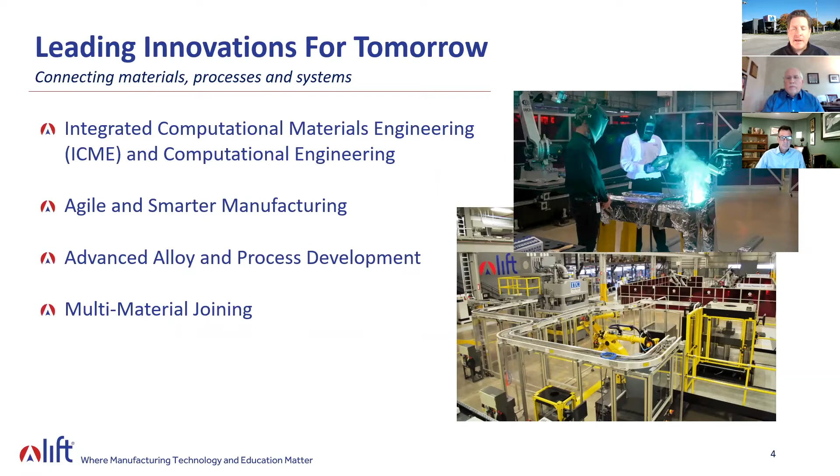So when we look at our Leading Innovations for Tomorrow, this is a quick look at our 4 pillars of technology. As you can see, it's materials, processes, and systems woven in between all of those. From digital side, examining materials from the integrated computational materials engineering side, to agile and smarter manufacturing, to advanced alloy and process development and multi-material joining. And you can see on this screen here how deep we get into each and every one of those. I won't give you a quiz on that, but you can just see how widespread and deep our technology goes, both in-house and across our national ecosystem.

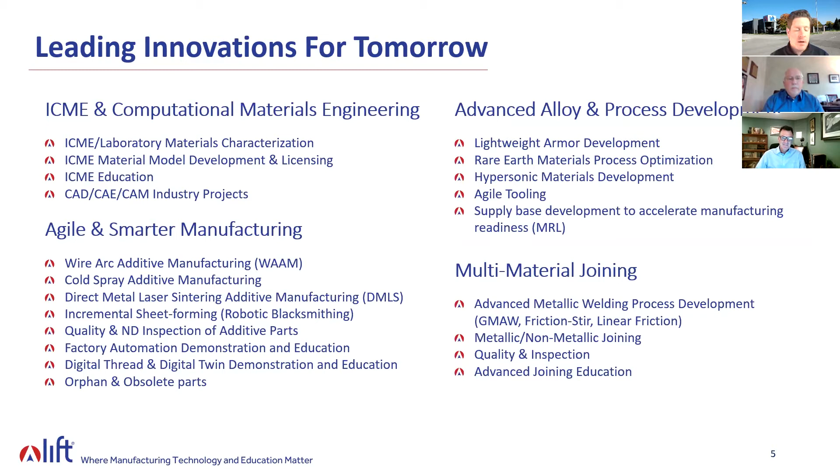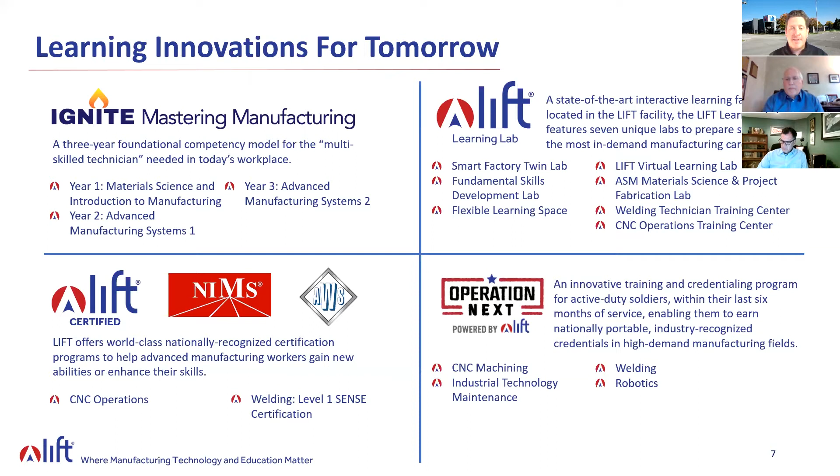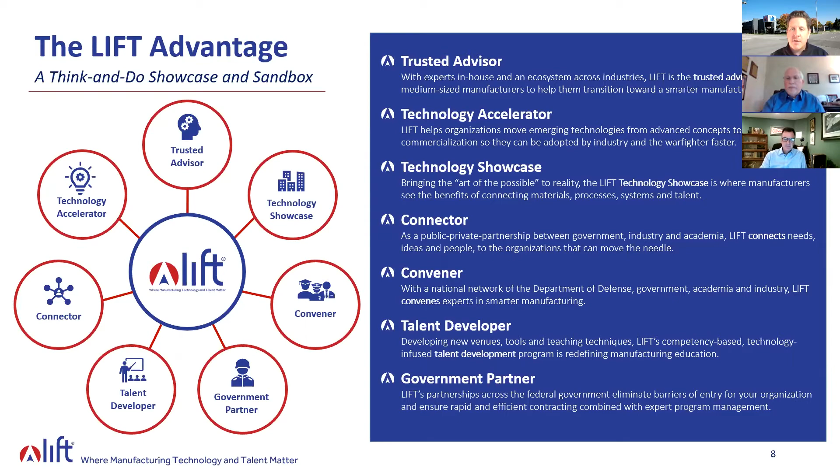I do want to hand the presentation over to Kevin and Charlie at the Techreo team to talk to us about their innovations in forming metal pipes. So I'm going to stop sharing my screen and ask Kevin to share his and tell you the show is yours. All right. Thank you, Joe. Hi, everybody. I'm Kevin McNeil, president of Techreo. I'm going to cover the first part of the presentation. I'm going to turn over to Charlie Ritchie, who's also on the screen here. Charlie is our vice president of commercial development.

So let's see. It's not advancing.

There we go. Sorry about that.

So Techreo is a technology startup company. We're in the Cincinnati area. And as Joe mentioned, we are focused on the development of high performance metal type pipes and tubes. So we'll start with a quick history lesson.

So pipes were first used around 4000 BC. So they've been around a long time. Copper pipes were first introduced around 2500 BC. So again, a really, really long time ago. And the current versions of both welded and seamless pipe have been around in their current configuration for about 150 years. So a long time.

These two versions account for about 99% of the metal pipe market. And while many refinements have been made, the fundamental pipe structure has really not changed much over those years. So we intend to be disruptive, and we've developed a totally new approach for how to make metal pipes.

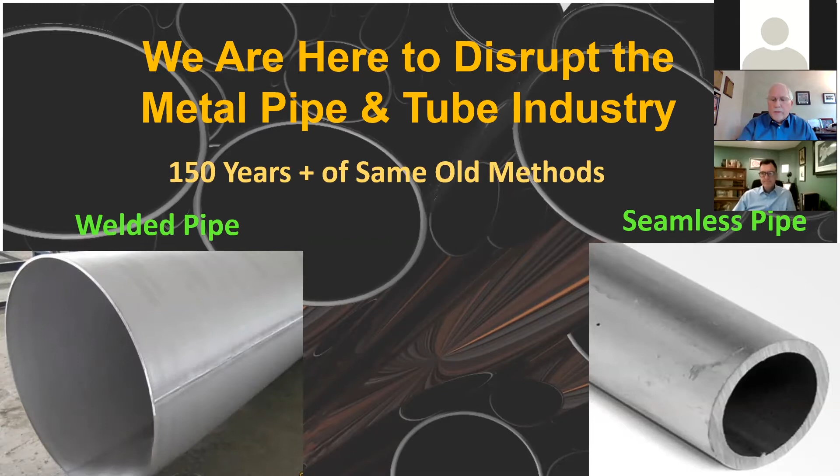So the new manufacturing technology is very, very different in several key elements. And basically what we're doing is we're reapplying some key technologies from the paper industry, which is where several of us worked previously. So we start with coils of thin cold rolled metal. We then unwind the coil, feed it into the winder, and along the way we bond adjacent layers of the sheet metal to each other with welding and or structural adhesives.

So there's some pretty general similarities to additive manufacturing in that we're building it one layer at a time. So this gives us the opportunity to differentiate by layer. That's pretty important. So we can change material at any point. We can change the thickness, the strength, topography, the bonding technique, pretty much anything we want by layer.

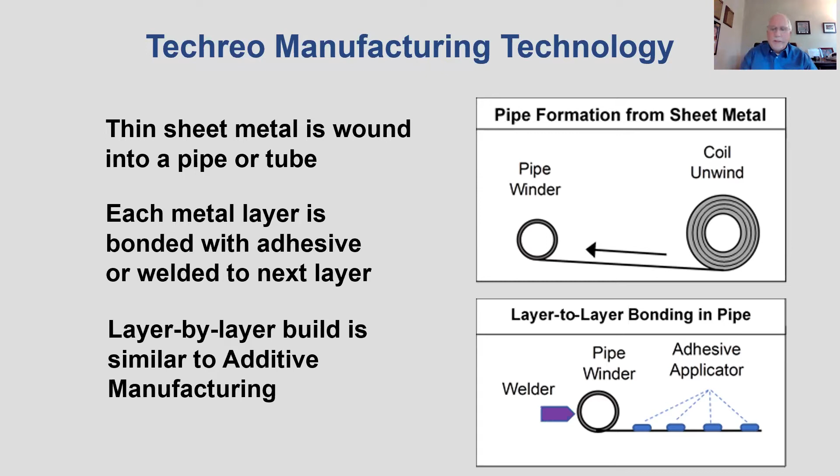A big difference from additive manufacturing, however, is build rate. So those of you who've worked with AM, you know it's pretty slow. Like maybe 1 to 2 pounds per hour of metal building. Our system is going to be much, much more productive than that. We think we'll probably be in the few thousand pounds per hour range. So that'll be a huge help for us in trying to minimize our manufacturing expenses. So again, a very versatile manufacturing technique that's also very new and different.

So the new process has tremendous flexibility. So we can use any metal that you can buy in cold rolled coil form, which is really just about everything. There's very, very few metals that don't come in that form. So far, we've tested carbon steel, several versions of stainless steel, copper, aluminum, and recently an Inconel type alloy. So lots of flexibility in terms of materials.

The bonding can be optimized for every application. So for example, we can use welding when we've got an application where we need high strength and a high pressure rating, or we can use structural adhesive, which is really good for building in insulation, noise, and vibration mitigation. So we can combine the two techniques and optimize the bonding for any particular application.

A key capability is that we can also splice in and out of different metal coils, so we can use multiple metals in the same pipe. So today it's really, you just get one metal. There's a few minor versions out there like cladding, but we have tremendous flexibility here and can use multiple metals. And I'll show you some examples of that and what the benefit of that is.

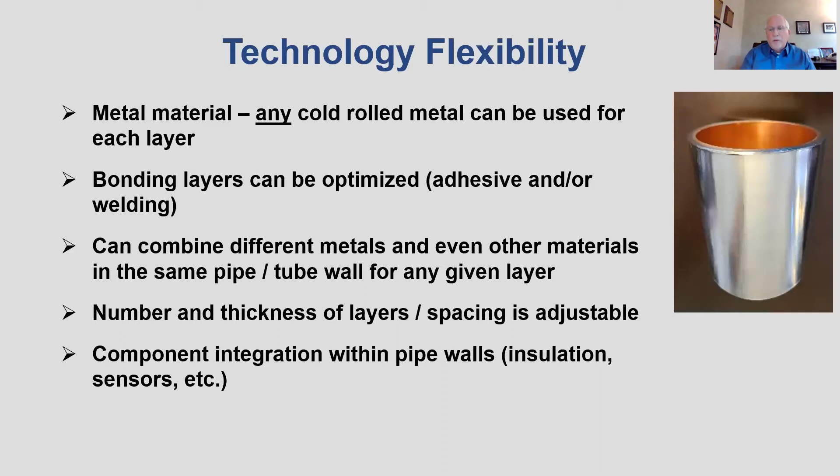So the industry's got a lot of needs relative to metal pipes. And while the current options provide a pretty wide range of capabilities between welded and seamless, there's still a lot of issues and constraints. So think about corrosion resistance. There's a lot of good solutions out there like solid stainless, copper, Inconel, and they all work, but they don't really work great in that the higher end ones cost so much more from a material perspective that people end up not using them.

So, how many times have you heard about a water main breaking? Well, if they'd used a stainless steel pipe, it never would have happened. But the county engineer chose to use a low cost cement-lined carbon steel pipe, and 10 years later, the cement cracks, the water gets to the carbon steel, it rusts through and you got a problem, right? So there's good solutions out there, but they're not great because the high performance ones are so expensive because you've got to buy the whole pipe full of that material, right? When you really only need it on the inside surface and/or the outside surface.

When it comes to weight, users generally accept whatever it is they get, right? Because there's not a lot of options. You can choose aluminum or titanium. If you're dealing with carbon steel and stainless steel, there's not a lot of options to get lighter and still work. So people sort of accept it for whatever it is.

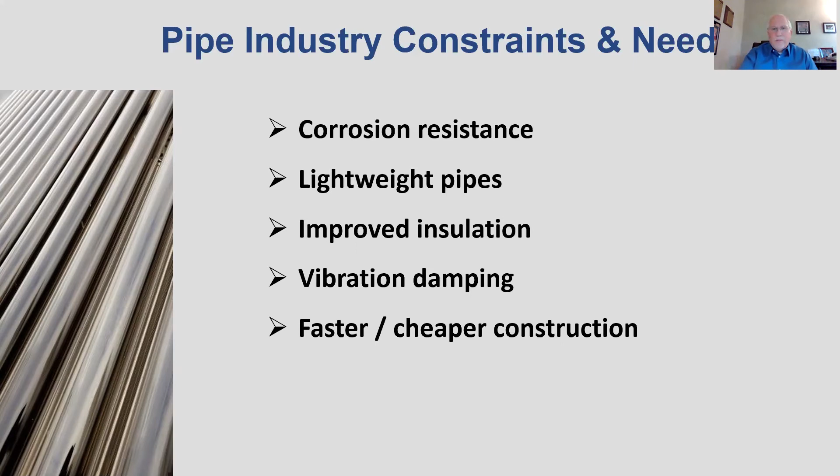So here's a few examples of our new pipe features available from the new manufacturing technology and how we can address some of those unmet needs in the metal pipe market. So I mentioned before, we can easily splice in and out with different coils and different metals. Here's 3 examples where we've done that. If you look on the left, that's like the previous picture. So we started winding with copper. So that would be on the inside surface of the pipe. Then we transitioned to carbon steel, which is pretty strong, but also very cheap.

And then we end up putting a stainless steel on the outside, so like a 304 or a 316. In the middle, we did the same thing, another example, where we went from stainless to carbon and back to stainless. And over here on the far right is an example, a little higher end performance application, where we started with Inconel and then went to carbon steel and then to stainless.

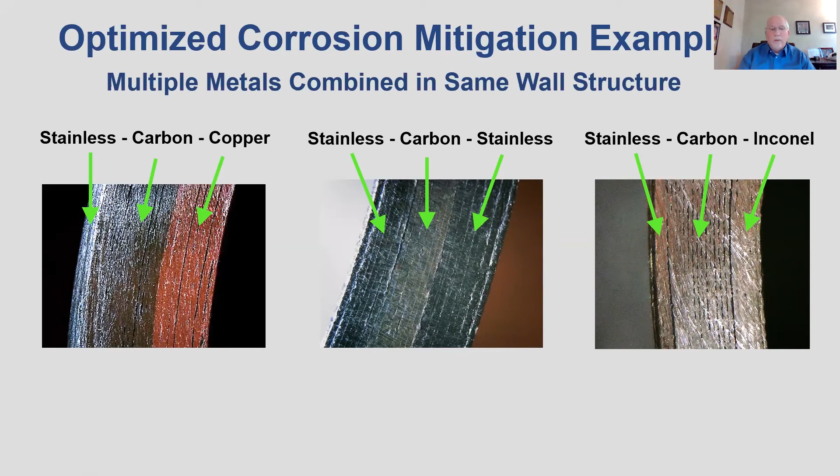Again, like the last example, if you wanted a pipe made out of solid Inconel, they are super, super expensive. I mean, you can get them, but you're going to pay a lot of money. So with our system, we can put Inconel just where you need it on the inside and then transition to other metals that are cheaper. So if you think about it, with the current system, you're paying for all that expensive metal and it's in the middle of a pipe wall where it's really not doing you any good. We can tailor it by region in the pipe. Okay.

Here's some examples where we can splice in and out and create lightweight options. So great for lift, which a lot of folks in this organization care about, lightweight and strength to weight. So here's some examples where, on the bottom left, we started with a stainless steel. We transitioned out of that, went to aluminum for most of the pipe wall, then transitioned back to stainless steel at the end.

On the bottom right is a picture where we started with a stainless steel winding, and this is actually a picture not of the finished pipe, but actually in the winding process. We paused and took some pictures. So you can see the stainless steel tube at the bottom that it's already been wound. And then you see the incoming sheet of carbon fiber.

So again, this is an example where we didn't even use metal. We transitioned to a completely different material, carbon fiber, super strong, but also very, very lightweight. It's a great example of the flexibility and versatility of the technology. If it comes in sheet form, we can probably put it into a tubular structure. In these two examples, both of these pipes ended up being about half the weight of a normal pipe, if you just made it out of solid stainless steel. So tremendous weight savings are an option here.

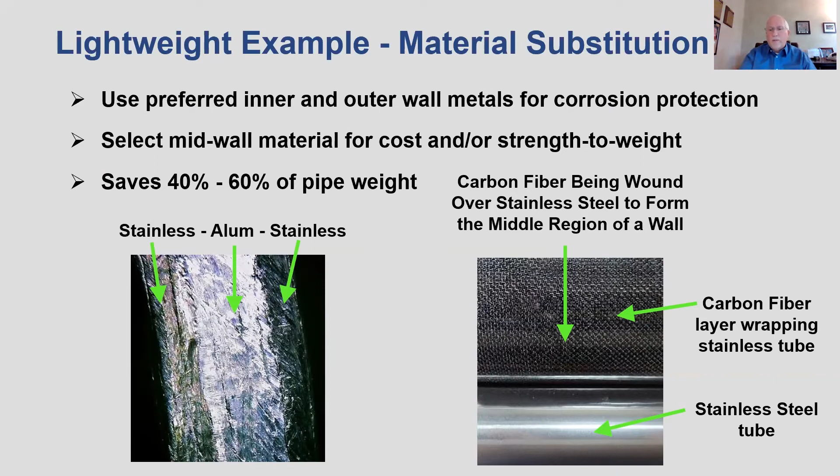And we transitioned to this open aluminum material. And again, it's solid on the ends, so you're not going to have anything be able to migrate into the interior of the pipe wall. And then after we wind most of the pipe wall with that perforated metal, then we enclose that with a solid stainless steel on the outside.

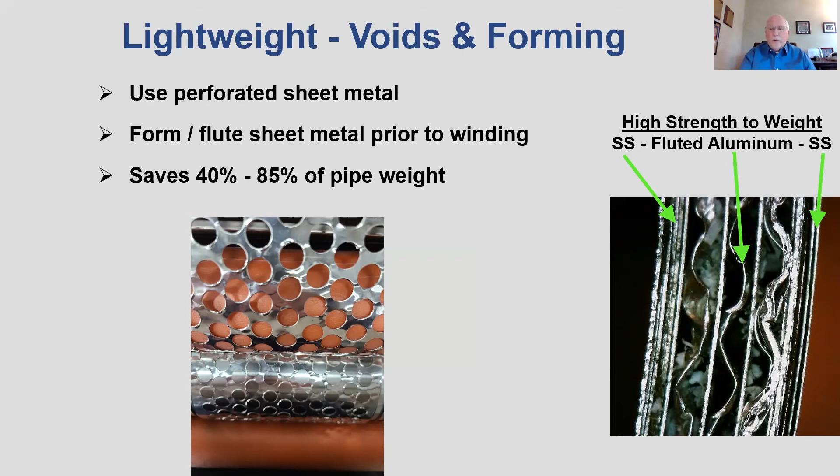In the real world, if we were joining these, they would be enclosed on the ends before we join them. So nothing would ever be able to get to that insulation. So you'd have a perfectly enclosed, hermetically sealed insulation cavity. So the insulation would basically last forever with zero maintenance.

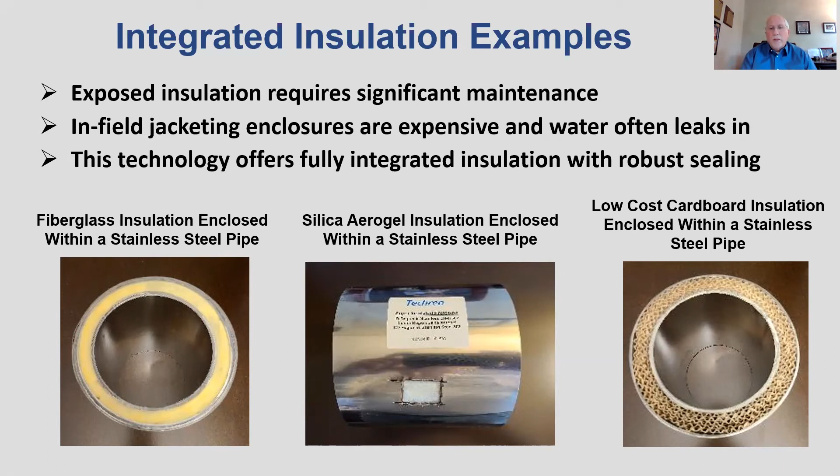But the key point here is that we've discovered that by building it in the structure, you get a tremendous amount of dampening that goes on between the layers of metal. So the metal layers actually don't even touch each other within the pipe wall. So A, great for insulation, and B, it's great for mitigating vibration.

So I mentioned before, if you take a normal metal pipe and you hit it with a hammer, it sounds like a big bang and then like a tuning fork. If you hit our pipes, it sounds like you're hitting dead wood. So tremendous difference based on a totally different structure. And think about huge reductions in vibration and noise that are also possible with this technology. So again, lots of benefits come out of this totally new structure and new ways to make the pipe.

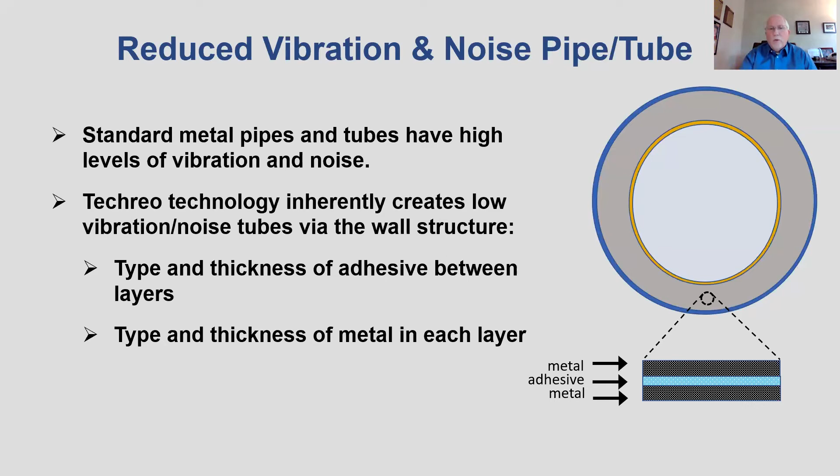So as you would imagine, we want to protect this breakthrough technology. So we have filed a number of patent applications. We're protecting it both in the US as well as internationally. And we are protecting the breadth of the new type products that we can make in the different configurations, as well as how we do different connections from one section to another, as well as all the new manufacturing process techniques that we use to create the new pipes.

So that's kind of an overview of the technology. And with that, I'll turn it over to Charlie, and he can take you through more of the business aspect of this.

Right, yeah. Kevin, can you keep sharing and step through? Sure, I can do that. Okay. Yeah, takes a while to.

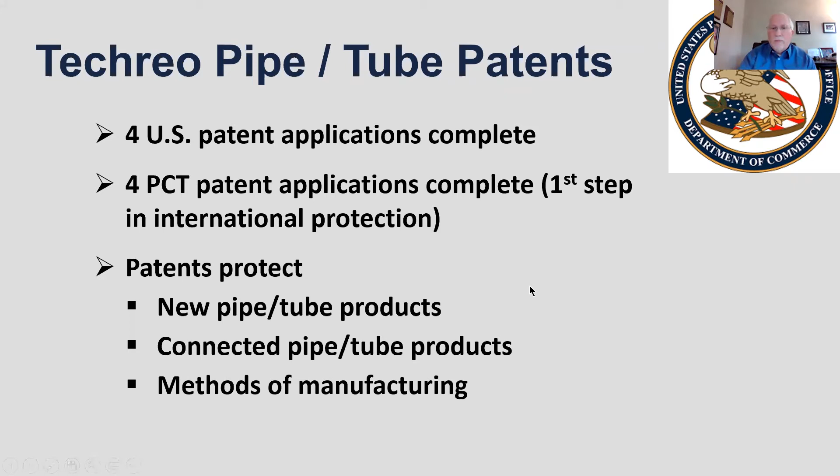Okay, I'll just start. Just quick introduction and thank you. Hello, Charlie Ritchie here, VP of Commercial Development for Techreo. It's a real treat. I think we're still quite new to LIFT, but it appears to be a real energetic and supportive community and organization. So we're thrilled to be part of it.

Our data was all pre-COVID, but the stainless market was growing annually 5%. In fact, with today's news of GDP at 6.5%, I think we're going to bounce back to that immediately. So we see that market trajectory, market growth continuing, and this new technology offers breakthrough capabilities, as Kevin mentioned. It's a super mature market, and it's really ripe for some kind of disruption. So we're excited about how our innovation can start to break through to do some of those disruptions. So next slide, I guess, Kev.

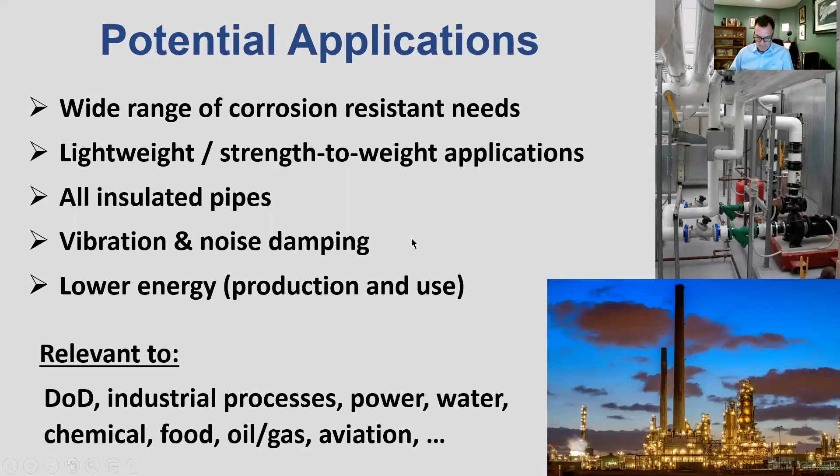And readiness. So we've been 2 years into this. Most of the key capabilities have been confirmed. We've done pilot scale testing and some lab work. We've successfully produced 70 prototypes in a wide range of diameters, and we've gotten down to 6 inches as well as up to 6 feet long. So we're growing in all of our dimensions.

We've now developed rough plans for a demo line, and we're to confirm our manufacturing capabilities and do some initial production runs. So we're moving forward. We are, but still at that development and prototyping stage. Looking forward to the demo line.

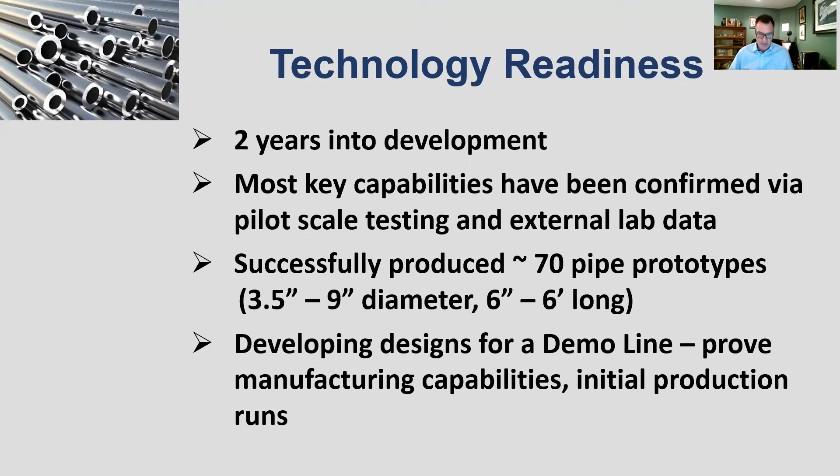And I think the next slide is really the reason we're here, to not do so much talking, but also do a lot of listening. Really, this reach out to the LIFT community here on this call. So any opportunity, based on what you've seen, what does this trigger? I've actually checked the Q&A while Kevin was speaking. There are a couple of good ideas out there we'll chase down, but we'd love to have some kind of, not sure how this works, Joe, as far as a discussion here, or do we do it via email exchange later?

But we're very much interested in opportunities you see, and also problems. We are designing or knocking down the problems we know about, such as insulation and lightweighting and cost, et cetera. But are there other problems you think this could help solve? In other applications, it would be of interest, of course. And the next thing is we're trying to break out of the development and prototyping stage into more of a development partnership, moving into our initial production line for the demo line.

And lastly, we're interested in really picking the brains of the participants here. Are there any resources out there you could refer us to? We're looking for people with production knowledge, maybe sales knowledge, or consumers or purchasers of piping, users of piping. And we're looking for someone who could put us in the right direction on all the above bullets, as well as other guidance. So we're looking for organizations or people you think we should be in touch with.

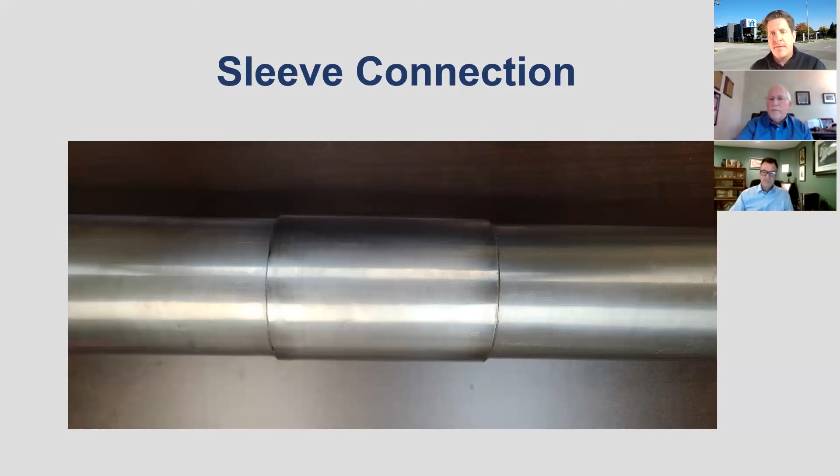Do you work with your customers, or do you envision working with your customers, on which materials make the most sense for which application, and kind of walk them through that process to say, hey, this will work better than that, or you should try this approach? So yeah, absolutely, Joe. It's a good point. I think that's a key advantage of this technology, is that we can dial in lots of capabilities for the application.

So today people oftentimes buy a Schedule 40 pipe because Schedule 10 is not good enough, and there's no option for anything between Schedule 10 and Schedule 40. And they really needed sort of the equivalent of a Schedule 18, but nobody sells Schedule 18. So they put in 40, and it's way heavy and it has way higher pressure rating than you need, and you're spending more money, and they're just overdoing it.

So what we anticipate doing is talking to folks about the application, saying, okay, how much pressure rating do you really need? How much deflection strength do you need? What do you need for insulation? What do you want for light weighting? And then we can figure out, with all these variables we have, how to optimize that for the given application. And you really can't do that today.

You just got to pick from an assortment of a few things you can buy, and then you got to try and field fit things on top of that after you buy it and install it. So we'll be able to do a lot of that up front and design it so it's optimized for your particular application. And someone did actually ask about high pressure systems. So that is something that's doable. You just need to take a look at it and design it for that specific pressure system.

Right. So we actually sent a bunch of prototypes to an external, independent lab here in Cincinnati, and had them test the strength of the pipe wall. We tested a pretty wide range, low strength metals to high strength metals, thin wall, thick wall. And there's an equation called Barlow's formula that you can use to calculate the tensile strength of a pipe wall, and that correlates exactly to the pressure rating of that pipe.